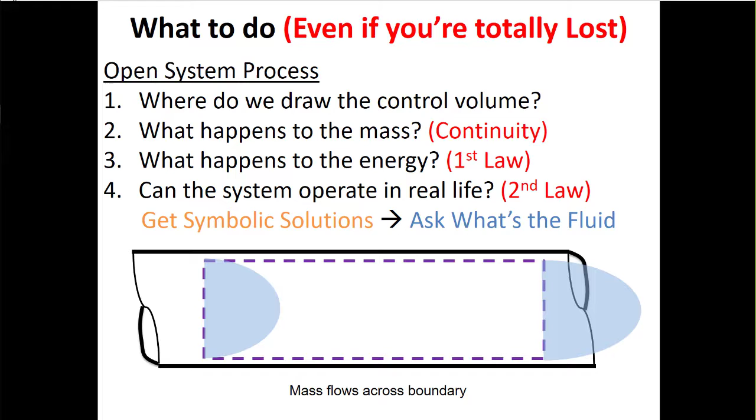You can do that for any open system problem. So if the problem is going to throw you a loop, it might be in how do you fix the state, right? And we know that fixing states can take a lot of time. So I always think, what's the highest rate of marks per minute that I can get on a test? I think getting the symbolic solution is a good way of demonstrating that you understand how to do the problem, and it tends to take much less time than when you start to fix the states. So that's my general advice - conservation of mass.

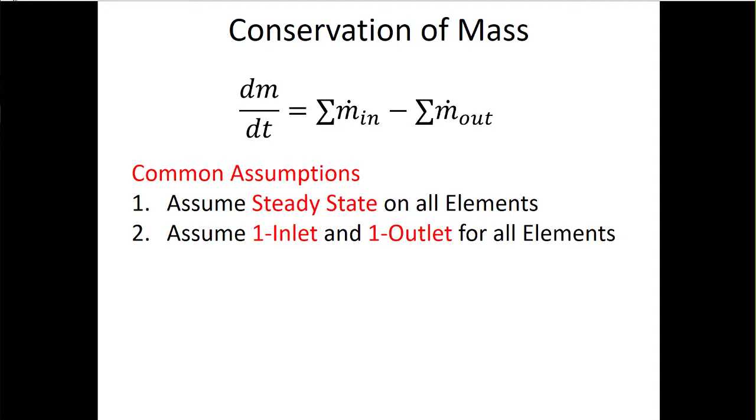Hopefully this expression is becoming familiar to you if it's not already. We know that dm/dt is equal to the sum of m dot in minus the sum of m dot out. Common assumptions, which are not the same every single time, are that the system is at steady state and often has one inlet and one outlet. If this is the case, we get the answer that the mass flow rate in is equal to the mass flow rate out, so sometimes we've seen that there's only one mass flow rate in our problem.

For open systems, the equation gets a little more complicated. I've written it out here as it would be for an imperial problem, because anytime a kinetic or potential energy term sticks around, my spidey sense starts tingling. The hairs on the back of my neck stand up, because in those terms I have to divide by gc if I'm dealing with imperial units, just to get energy per unit mass. If it's a metric problem, it's still going to give me an issue—I don't divide by gc, but it'll probably be in joules per kilogram instead of kilojoules per kilogram, so I've got to check the units there.

It's doubly hard maybe in imperial, because even after I divide by gc, often I'll get something like foot-pounds per pound mass, whereas when I look h up in the textbook, it will be in BTU per pound mass. So I might have to do something like divide by 778 to convert those foot-pounds into BTUs.

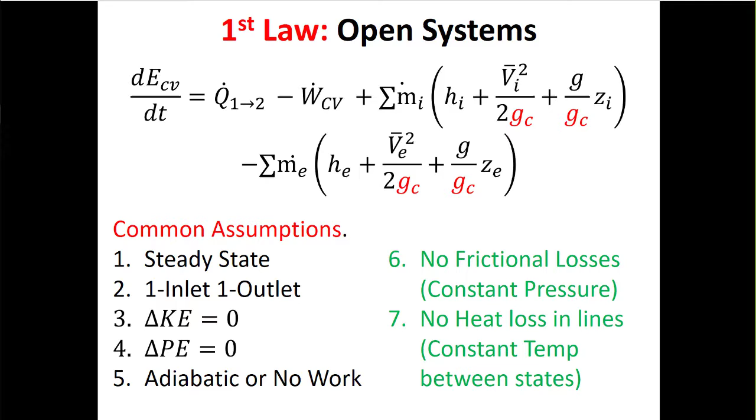Again, there's a list of common assumptions here associated with these different terms. If it's steady state, which in this class it basically will be, we'll cancel that term out. Often our open system components we assume are simple systems, meaning they either consume or produce power, or they transfer heat—so typically we can cancel out one of these two things, although I might ask a question on an exam that lets you demonstrate what to do if you have, say, a turbine with heat loss associated with it. One inlet and one outlet would mean we'd get rid of the summation signs, and usually we'll cancel out kinetic and potential energy terms as well.

When we deal with the second law, remember, whenever we do second law analyses, really what we're trying to do is figure out what's going on with this entropy generation rate. Sometimes, depending on how the question is worded, you don't even actually need a numerical answer here, because to figure out if something is possible, we only need to know if sigma dot is positive or negative.

So as an example, we've asked multiple choice questions where we ask if this thing is possible, and one of the answers is there's not enough information to figure out if it's possible or not. That can be true sometimes, but sometimes you can figure out if this term is positive even if you don't have the magnitude of the heat transfer. If I tell you there's heat loss in the system, for example, that might let you figure out the sign of sigma dot without knowing its value.

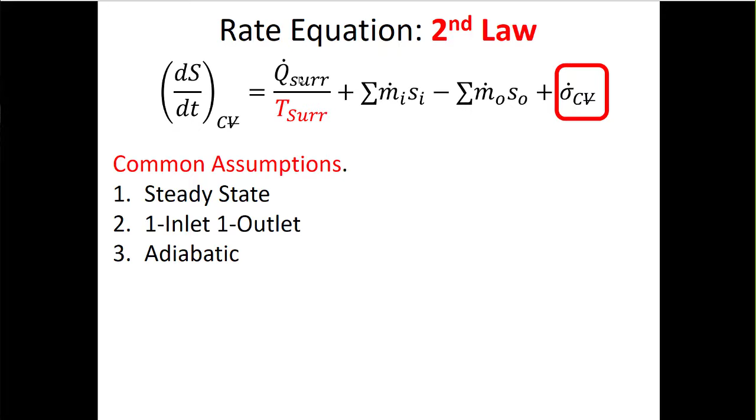So it's good to write down the equation, make your assumptions, get to that symbolic solution, and then see what are the terms. Even if I don't know the magnitudes of the terms, if they're both positive after I've isolated for sigma dot, then that means it's possible no matter what. So if I'm heating something up, for example, and I know the specific entropy is increasing and I'm adding heat, then I know the system definitely has to be positive. But you can figure that out mathematically just by looking at the terms of the equation.

After you get all your symbolic solutions, you'll invariably be left trying to solve for delta H or delta S. This is not unlike the first exam, where we were ultimately trying to solve for delta U. So after the symbolic part of the problem, we have to ask ourselves, what's the fluid? We basically have two types of answers: one is something like water, where we boil and condense the fluid, but it could also be something like refrigerants when we start dealing with refrigeration systems.

So that could also be under the vapor dome, right? And then we have to figure out what the phase is. So what's the fluid is always kind of a two-part question. So I say, what's the fluid? Oh, it's water. Okay, I know that it's water. Is it a subcooled liquid, or is it a two-phase mixture, or is it a superheated vapor? So it's kind of a two-part question, right?

And sometimes it'll be easy, like if they give you quality, then you can figure out pretty automatically it's got to be under the vapor dome.

But if, for example, you know that it's at the end of an isentropic turbine, right? So isentropic means delta S doesn't change, so you know S at the outlet, and now you look at that outlet specific entropy and figure out, is that above or below SG for the given temperature or pressure at the outlet? And then you can figure out, is it two-phase or is it superheated vapor? So sometimes it's obvious what the phase is, sometimes you might have to do a little digging to see what the phase is.

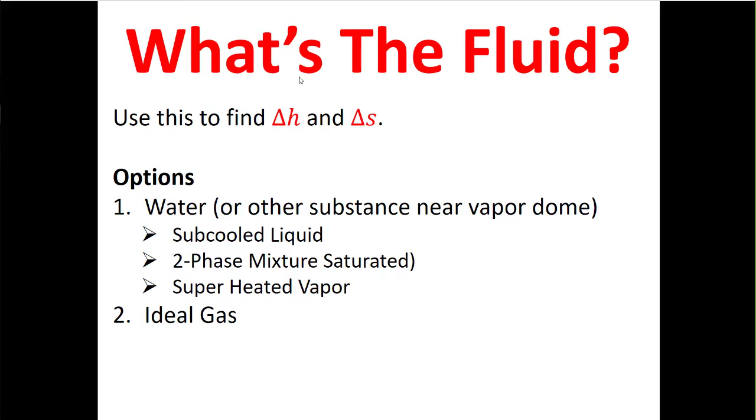Now, so if we're trying to find delta H, if we're trying to figure out what's going on with the first law, then maybe we're looking in tables. So this is certainly going to be true for water. If it's a subcooled liquid, we can also use the assumption that delta H is equal to CP times delta T. Although for liquids, CP and CV are the same, so you could just have C there.

When you do that, make sure you check your units, because we ultimately always want to have something like delta H in terms of, if it's metric, kilojoules per kilogram, because that's the H's we're looking up in the table, or if it's imperial, in BTU per pound mass.

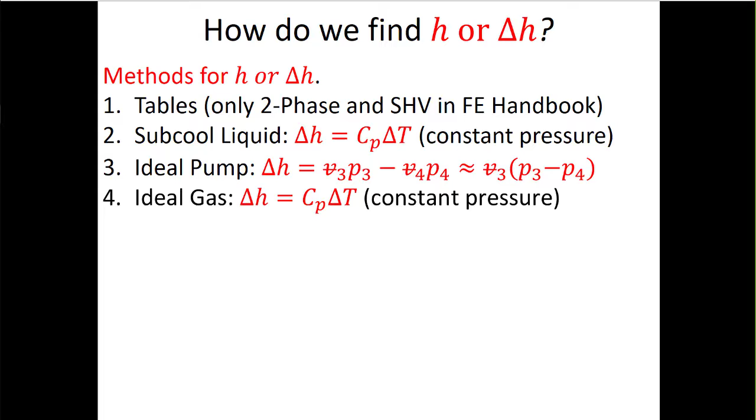Delta S, we started to talk about this. There's one more thing that I'll say about this today. So for solids and liquids, things like water, it's basically the same thing. We're going to look on the same tables and look up the same values.

But then we also have this new idea of isentropic pumps or turbines. We'll talk about compressors more later, but pumps, turbines, and isentropic or ideal compressors will be the same, in that the change in S across that device is going to be equal to 0. That's isentropic. We can get that from the first or second law, provided our system is at steady state, is adiabatic, has one inlet and one outlet, and is ideal. Then we end up with delta S equal to 0.

So we talked about how for subcooled liquids, we can find delta H as CP times delta T. When we're finding delta S, we replace that delta T with the natural log of T2 over T1.

For ideal gases, it's a little bit trickier. If we're doing variable specific heat, then we have delta S. On table A22, it's only got this S superscript 0 value. So this delta S superscript 0 is kind of like the change in specific entropy related to the temperature change. But then we still have to account for the pressure.

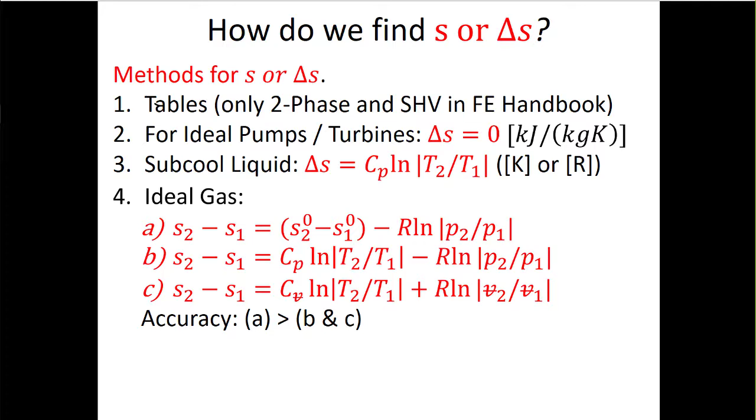As always with ideal gases, when you use variable specific heat, your answer is more accurate. When you use constant specific heat, you gain in convenience and suffer in accuracy. And that accuracy gets worse as your temperature difference gets bigger.

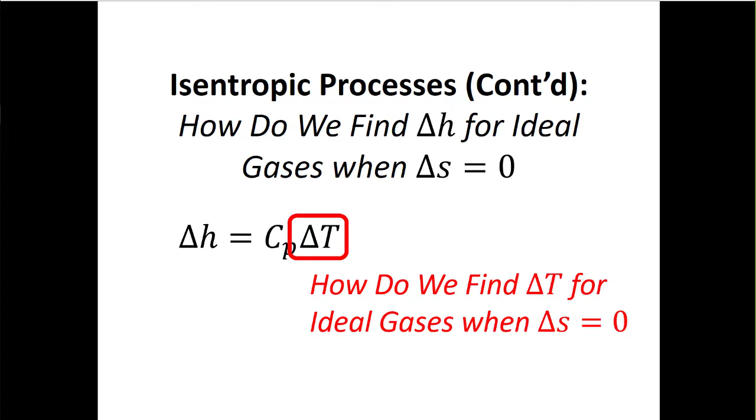So one thing we didn't talk about for ideal gases is how do we find delta H for isentropic systems. If we have an isentropic compressor, for example, or gas turbines where we assume the working fluid is something like air, you might want to find delta H in a case where the system is ideal. So we can look at something like Cp times delta T. Now, how do we find delta T if delta S is equal to 0?

So if we're trying to find the change in specific enthalpy, delta H, when the change in specific entropy, delta S, is equal to 0, there are a couple of options. If I'm doing constant specific heat, then I'm looking for an expression that has K in the exponent. Remember, K is Cp divided by Cv. So anytime you're using this, you've assumed that the specific heat is constant.

For open systems, we'll normally know the pressure differences, so you'll use this expression. This is all in the equation sheet, and I tried to organize it in a way that I thought was useful. There's a part of the equation sheet that talks about isentropic ideal gas processes, and then you know you can use this expression.

If you're looking for a system where you know the ratio of specific volumes, so a closed system usually, then you'll use this expression, which again has K in the exponent. It looks very similar. There's also this equation which relates the ratio of pressures to the ratio of specific volumes. I don't think in the 6 or 7 years I've been teaching this class that I've ever used that equation, but the first two are really useful.

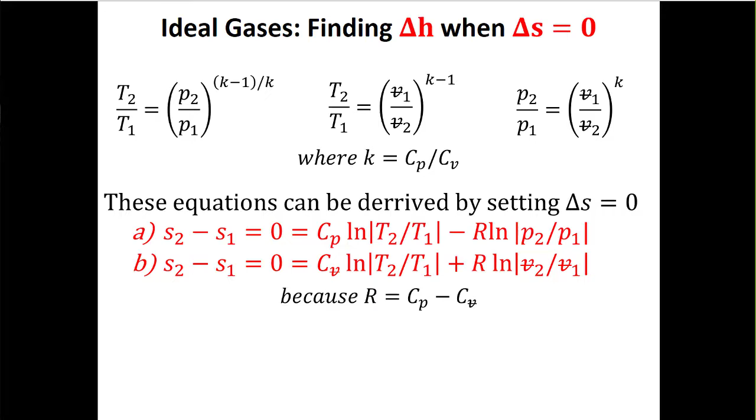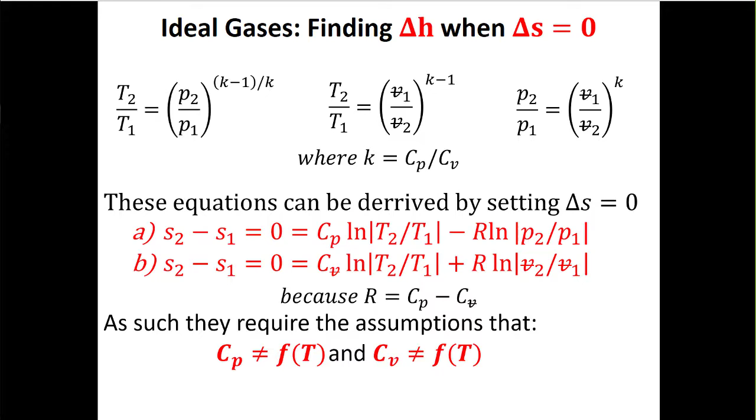These equations, essentially, you won't have to derive them, but they fall out of our equations for delta S when we're using constant specific heat. So then we can use these expressions. There's another way to do this for variable specific heat, but I don't think I'll test you on that in the exam because we haven't really had a chance to talk about it. It involves looking at a new parameter on the table. We'll do that when we start to talk about internal combustion engines, turbines, gas power plants, or jet engines. We won't really get into that here, but you'll be tested on it in the final.

So here's a quick example. If we have an isentropic compressor, remember, a compressor is like a pump. Its job is to increase the pressure. At the inlet, we start at 300 degrees Kelvin, close to room temperature, and close to atmospheric pressure, 100 kilopascals. Now we increase the pressure by a factor of 8, up to 100 kilopascals times that factor. That's the job of a compressor, to increase the pressure.

And we're asked to find the compressor power divided by the mass flow rate. Sometimes the textbook calls this the specific power, but that's just compressor power divided by mass flow rate. We're also told that this is an isentropic compressor. So you could get a problem worded like: find the maximum possible power, or I guess it would be the minimum possible power consumed by this compressor. That would be the isentropic state, because there's no irreversibilities here.

Hopefully we're familiar with the first law analysis. Here we'll assume that it's steady state, so that dE by dt term goes away, the Q dot term goes away because it's adiabatic, the summation signs go away, and we'll get rid of the kinetic and potential energy terms. So we'll get this expression we're used to when solving the first law for power: W dot is equal to M dot times H in minus H out.

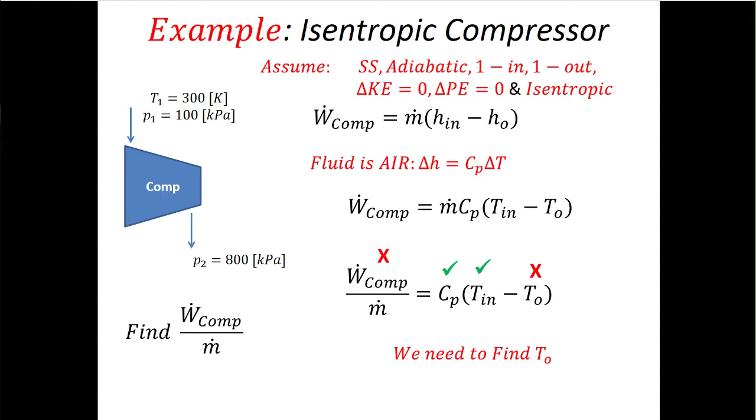So normally I'd look for a second independent intensive property at the outlet. Actually, because it's air, if I just knew the outlet temperature, I'd be fine, but I don't know the outlet temperature. So I need to know something about the process to help me fix the state. In this case, the thing I know about the process is that it's isentropic, or that delta S across this compressor is equal to 0. We're assuming this is an ideal compressor, so I can use this expression because I've assumed it's isentropic.

So now I say that T2 over T1 is equal to P2 over P1, all raised to the exponent K minus 1 over K. This is nice because I can multiply both sides by T1. Even though I don't know the temperature at the outlet of the compressor, I do know the pressure. So if I look up K in the textbook, or maybe it's given to me in a problem, then I know everything here, so I can find T2.

Right, so now I know everything here. I can put some numbers into my calculator. The nice thing here is because in the brackets I've got a ratio of pressures, I don't really have to worry too much about the units, as long as the units are the same. That's what I like about these—if you get pressure over pressure or temperature over temperature, just get them into the same units and you're just going to have a ratio here. So it's 8 times more pressure.

And then I get a value for my exit temperature, or at least what the exit temperature would be if this was an ideal system. I put that into my original equation for power over mass flow rate, and now I know everything for this problem and can get an answer. I'll check my units and see that I get a power that's negative, which is what I expect because a compressor is like a pump—I'm putting power in, so work in is negative. That's why I always like to calculate power as hi minus ho, because that will always give me the right sign, and then I can just add the works together. So that's how I deal with something that's like an isentropic compressor.

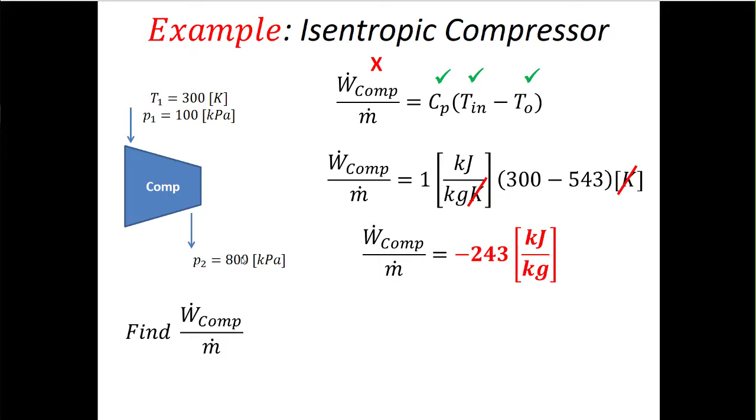So essentially, you're just looking to see—once you get to the point, oh, what's the fluid? The working fluid is air. And then you say, oh, it's an isentropic process, and that opens the door to using those isentropic expressions. So we said that the power is negative there, which is what we expect.

So now we're going to introduce the idea of what we call vapor power systems, or the Rankine cycle. The good news is we already know a little bit about the Rankine cycle—we did this when we were talking about ideal engines.

Kind of the simplest version of a steam-driven power plant, something like a coal power plant, would be this schematic here, where we have four components. We have a boiler, which is where we're adding heat—that's where we boil the fluid, aptly named. Then we have this turbine, and that's where the gas expands to produce power. But going into the turbine, we need high temperature, high pressure steam. That runs through the turbine.

And then the whole rest of this stuff is just to get back to that high temperature, high pressure steam. So first we take that steam and we condense it, because liquid water doesn't cost us very much power to increase the pressure. So then we run this through the pump. But now we have high pressure liquid, and we want high pressure steam, so then we boil it again, and we just keep going around and around and around. So this is the Rankine steam generation cycle.

Now, hopefully in all your classes you kind of think this—sometimes maybe ruefully. I remember when I was learning the heat equation, it was taught by a math professor, and it's like a differential equation. He's like, oh, this is like a heat equation, you mechanical engineers—and it's like we hadn't taken heat yet. So I was like, why do I care about this equation? And then the next year when I took heat transfer, I was like, oh, that's why. So you can never get the timing quite right.

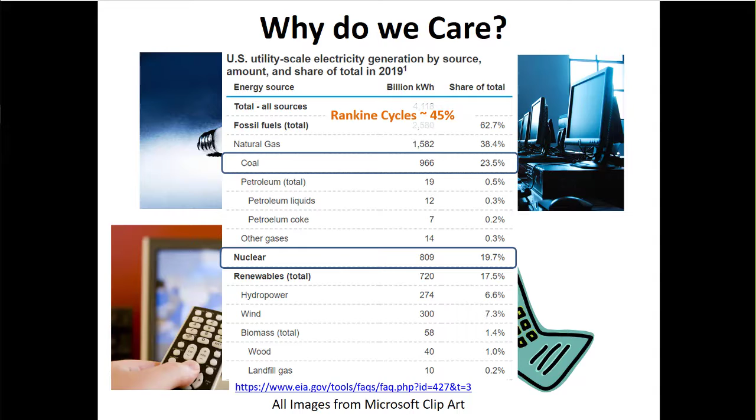Things like power generation - when I turn on the light switch, I'm never really worried that it's not going to go on, or at least I'm rarely worried. I think the power here in Rochester goes out a little too frequently, but even still, it's like a total of 10 hours it's down a year or something like that. Which is kind of a remarkable achievement, because engineers, technicians, and laborers are working really hard to make sure that we have things like power all the time.

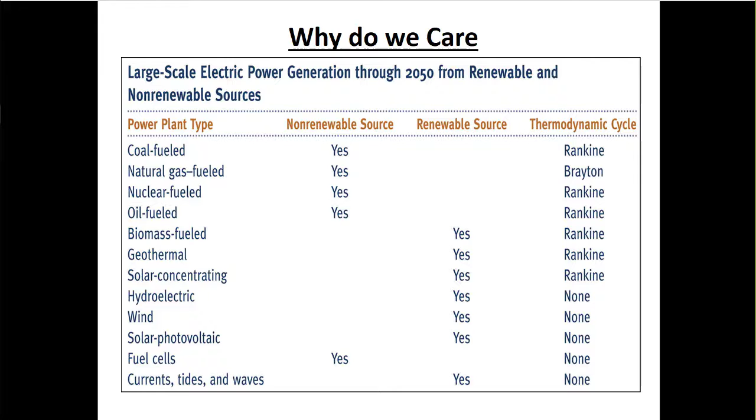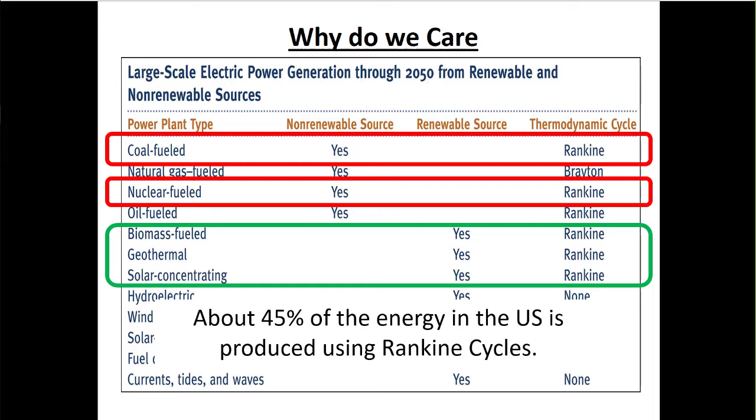So when we look at this table presented to us in the textbook, coal-fired power plants run on Rankine cycles. Nuclear power plants run on Rankine cycles. And then there's some renewable type energy systems that are also trying to use Rankine cycles to generate power. I think this tends to be a fairly small slice of our energy pie, but we're always trying to drive that up so we can limit the downsides of coal and nuclear power generation. About 45% of the energy we use here in the US is produced using Rankine cycles.

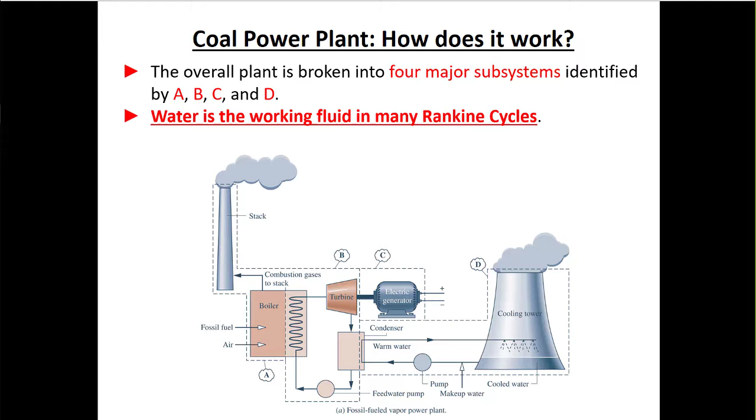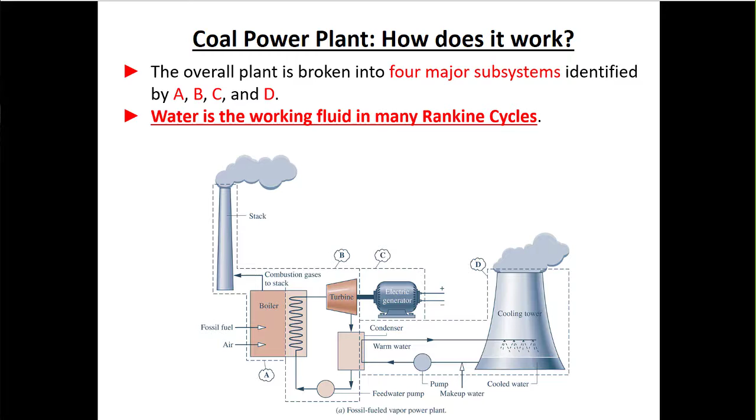So how does a Rankine cycle work? It's a bunch of different components that we can think of as open systems stacked together - now we're finally at the point where we understand how to do the Lego blocks, and now we're putting the Lego blocks together to make something cool. In the Rankine cycle, usually you have something like water running through it - boiling, going through the turbine, condensing, pumping up to pressure, and just around and around and around. Usually it is water, but for some renewable sources, or particularly when your heat input isn't that high, you could use other fluids that boil with less heat added.

So there are different kinds of subsystems involved in Rankine cycles. The first thing you need is to add heat, because that's what thermodynamics is - we put in heat and we get work, literally that's what thermodynamics means. So the first subsystem of this power plant is how do we get the heat, and this is actually usually how we classify different power generation systems. We talk about a coal power plant where we burn coal. We talk about a nuclear power plant where we run a nuclear reaction to generate heat. We talk about natural gas power plants - it's kind of a big deal in the US - we're burning natural gas to get heat. So that's how we get heat.

That's the first part. Then there's the part we're more interested in for this class, particularly for mechanical engineers - what are we going to do with the heat? How do we take that heat in and turn it into mechanical power?

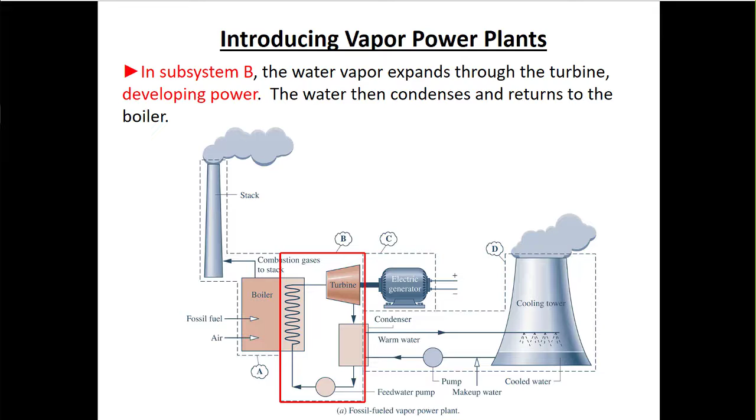The next subsystem - this is the reason, I don't know if you've ever seen old sawmills. Old sawmills have this big paddle wheel that's often in some kind of river, and as the river is running, it's turning that power wheel. That's going to be connected to some system, and then maybe to some four-bar linkage that's running a saw blade back and forth or something. It's great because engineers - we're not lazy, we're efficient - and it's not super efficient if you're the person sawing down trees all the time. So we were generating power, but you could only do that locally. The sawmill had to be beside the river for that system to work.

Then what happened is we made friends with electrical engineers, or electrical engineers started doing stuff. And then what we realized is I can generate mechanical power somewhere far away from my house. This turbine has a shaft that's spinning, and now I can connect this electrical generator to that spinning shaft. What the electrical generator does is take in that mechanical power and put out electrical power onto the grid.

Now, when we start talking about AC signals, we can transmit that power over power lines for pretty far distances. So you don't have to be in that sawmill right next to the river to get the power. You can put your sawmill wherever you want and just plug your electric saw into the wall.

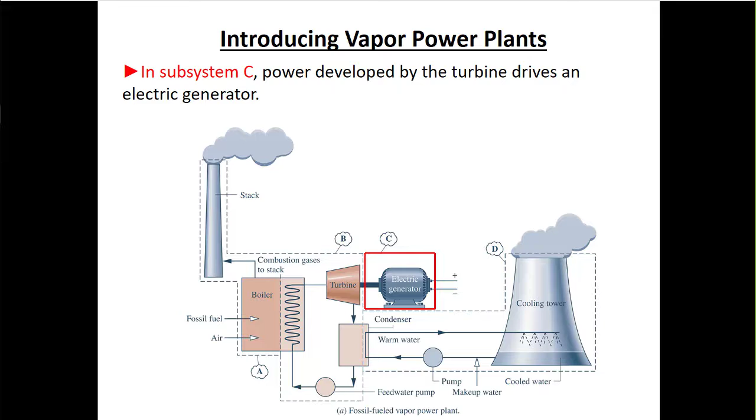The other part of this system: remember Kelvin and Planck told us you can run a heat engine, and that's what a nuclear power plant or coal power plant is. It's a heat engine because we're putting heat in and getting work out. But Kelvin and Planck told us we have to cool that system down.

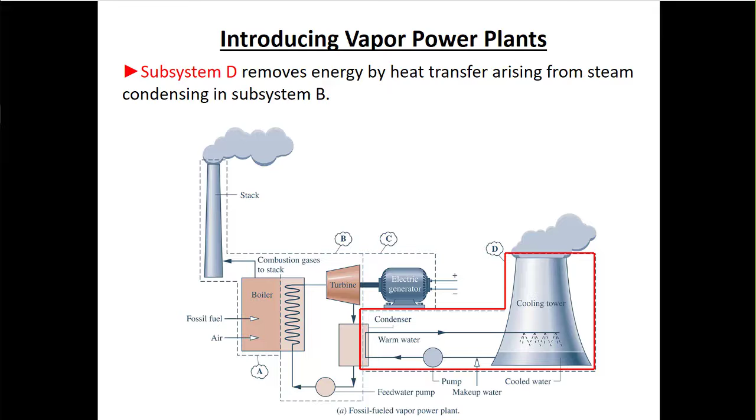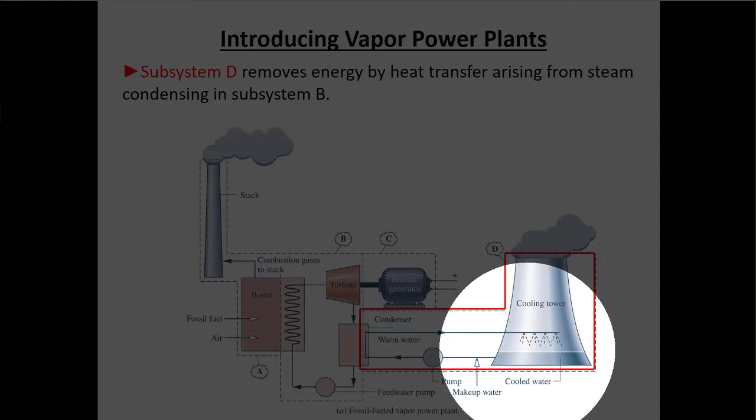So the way we cool this system down, at least in this figure, is we take that low quality steam that comes out of the turbine and cool it down. Here there's one of these big condensing towers, like you might see in The Simpsons. You spray this low quality steam in here, and the vapor goes up, but as it moves up this cooling tower it starts to condense and falls down. So you get cooled water down here, which you pump back into the condenser. Then this liquid water gets heat from here, maybe boils, and comes back in. So this is one way of doing it.

But we could swap this out. I did a little bit of consulting for a company that was itself consulting for Ontario Power Generation when I lived outside of Toronto. The way they cool the nuclear plants there is they take liquid water out of Lake Ontario and put it back in. But there's regulations about how much you can heat that water up, so you're not destroying the ecosystem in the lake. So that's another way — using Lake Ontario as a big heat sink. We need a heat sink in our system.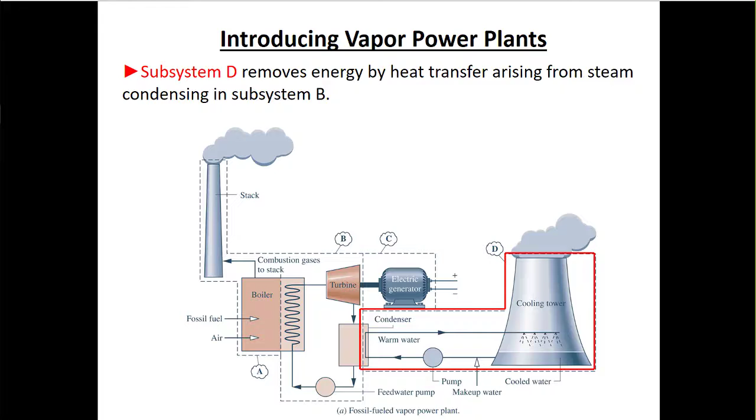Now, when we talk about Rankine cycles, we'll be independent of these other parts. We're really only interested in what's going on in subsystem B. We don't care how we're generating heat. We don't, in this class, talk about how to design an electrical generator to get that power onto the grid. And we're also not always super concerned about where the heat sink is — whether it's a cooling tower like this, or pulling water out of Lake Ontario. Really, we're worried about the guts: what's going on in here. This is what we'll be talking about — our turbine, our condenser, our pump, and our boiler. That's what we're going to be looking at.

What's going to happen is in here you have some working fluid, usually water, that's just running through this system on a cycle — around and around and around and around — and generating power for us.

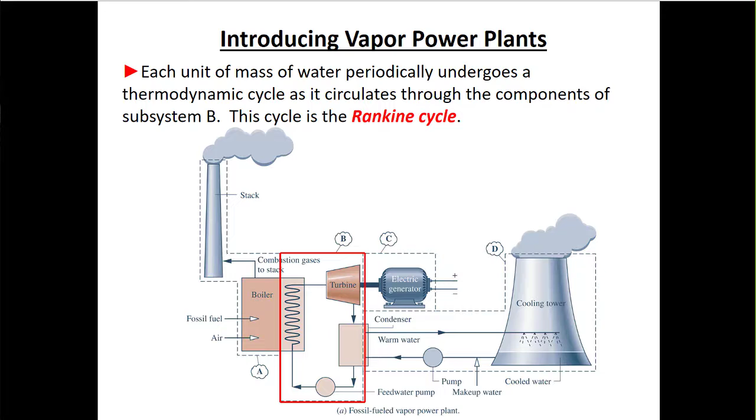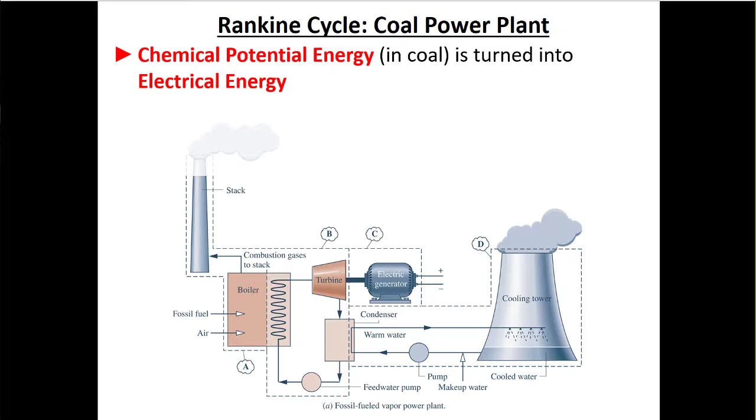If you have a coal-fired power plant, what we're doing is taking the chemical energy stored in fossil fuels like coal and liberating that into heat by burning the coal. Now, like all energy generation, this has a downside. It's good because it puts power on the grid, and we like power. But it's bad because there are emissions — we don't like the CO2 emissions.

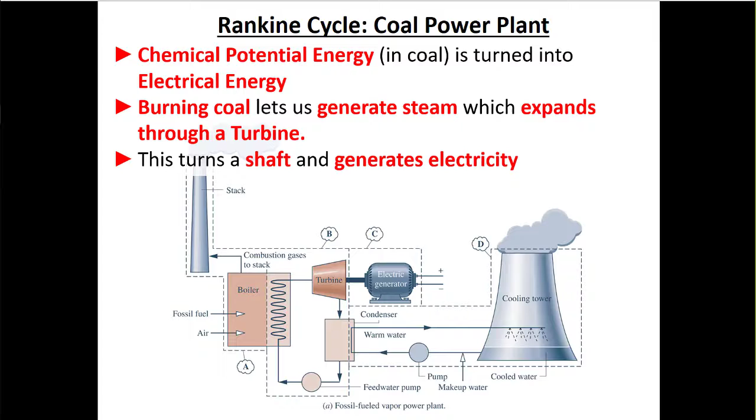So it lets us generate steam, which expands through the turbine because we're burning the coal. And then ultimately, inside our Rankine cycle, we're using that to get mechanical power in this spinning shaft, and we turn that mechanical power into electrical power through this electrical generator. So the cost here is that we're adding heat, and to add heat, in this case, we're burning coal.

Now, I remember being a little disappointed when I figured this out, or when I was told this: really, a nuclear power plant isn't much different than a coal power plant. Somebody figured out how to split the atom — amazing, one of the pinnacles of human ingenuity. And a mechanical engineer looked at that and said, it generates a lot of heat, I bet I could use that heat to boil water. So really, what we're doing is we just found a different way to boil water.

So this nuclear reaction puts out amazing amounts of heat, and we use that to boil water, and that water just keeps running around in our system over here. So it's the same thing, right? It's not much different than a coal engine, like an old style steam engine. We just figured out a better way to boil water, right?

Now, as you probably know, one of the big benefits of nuclear is that there are no emissions, right? The downside, of course, is catastrophic failure can be very catastrophic, right? There's no form of energy generation that doesn't come with a downside.

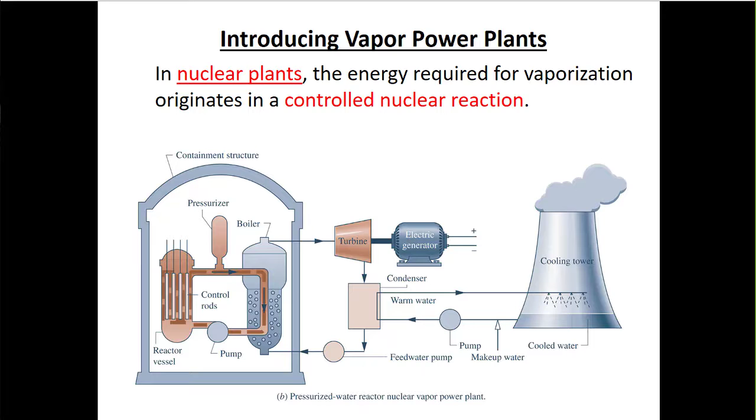So it's our job as engineers, if you're involved in a project like this, to make these things as safe as possible, because the downside risk, while the chance of something bad happening is very low, the cost of something bad happening is very high. Not just the monetary cost, but the human cost too. Not just the human cost even, but the environmental cost as well.

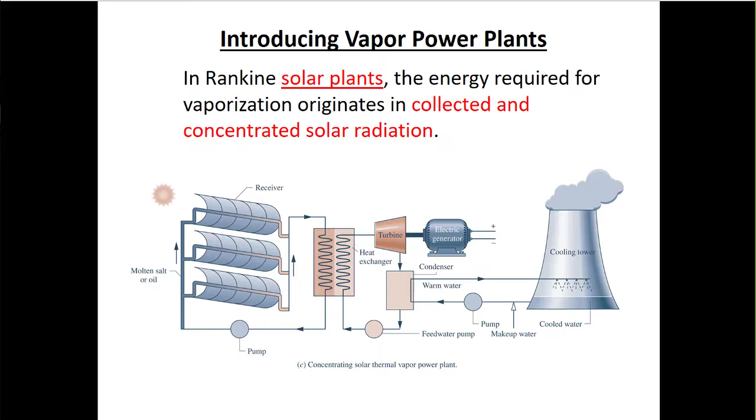So this is probably not the only way, certainly not the only way to get solar power, and not the normal way we think of solar power generation. But it's certainly something that you could do.

You could do this with geothermal plants as well. So geothermal means that we're taking heat that's being developed in the earth, and we take that heat out in a system. And then again, we're using that heat to boil some working fluid to run through the cycle.

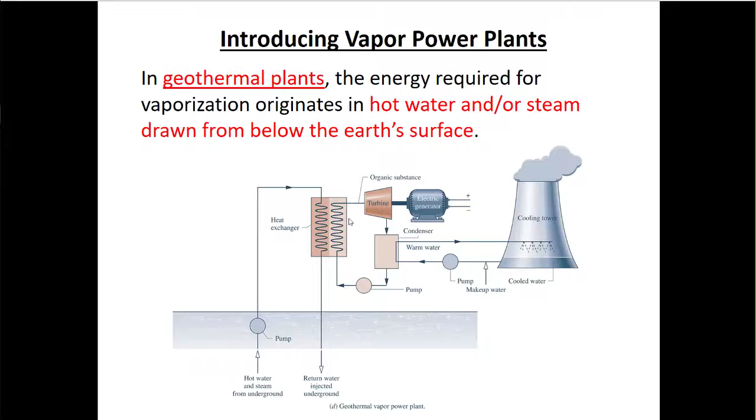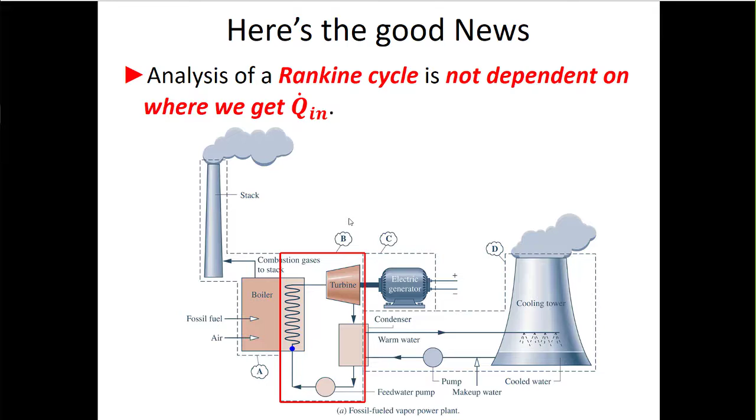So all of these different things, there's different ways to generate heat, but we're sort of heat agnostic when we're talking about Rankine cycles. That means we don't care where the heat comes from in this class. We just use it as an input into the system, and we'll analyze the guts of the cycle here: the turbine, the condenser, the pump, and the boiler. It's the middle that we care about. We don't care how you're generating heat, and we don't care how you're rejecting heat either. We're going to analyze the middle of the system, because this is where the efficiency gains can happen if we're trying to develop a system like this.

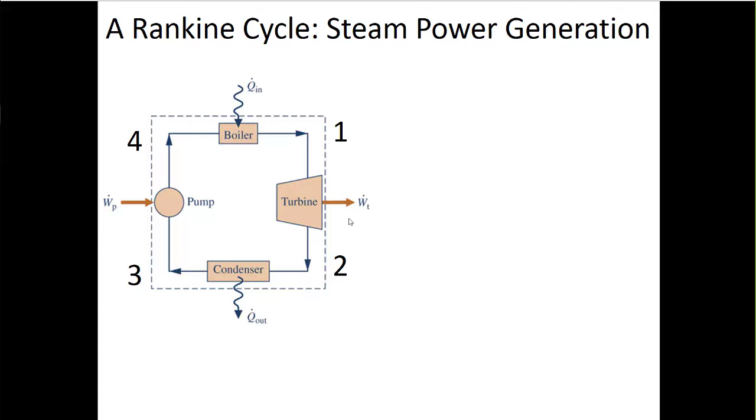So a Rankine cycle, at least the most basic form, would look like this. In practice, they're much more complicated, and we'll get into some of those complexities because we fight tooth and nail for any sort of percent increase in efficiency that we can get. But it makes sense to start at the beginning. The most basic version of a Rankine cycle we can have has one turbine, one condenser, one pump, and one boiler.

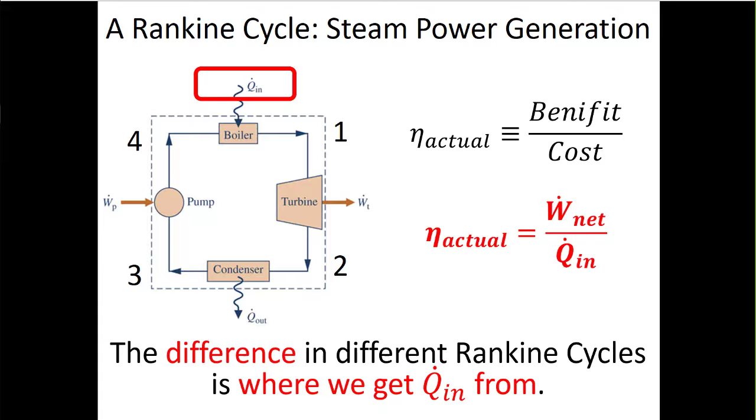And what we're going to do is, it doesn't matter where the heat comes from. The way we're going to analyze the system is we're going to look at these components, and we don't care where the heat comes from. We talked about analyzing a system like this globally by talking about its thermal efficiency. So now we take the energy benefit, that's going to be the net power produced: the turbine power, which is positive, plus the pump power, which is negative. That's our net power, that's the energy benefit. And the cost is that we had to add heat, either by burning coal or maybe by running a nuclear reaction. So our thermal efficiency here is the net work divided by the heat in. But we don't care where the heat came in when we're calculating the efficiency here. That's just a characteristic of the cycle.

So like I said, this is the simplest case, and it's got four components: a boiler, a turbine, a condenser, and a pump.

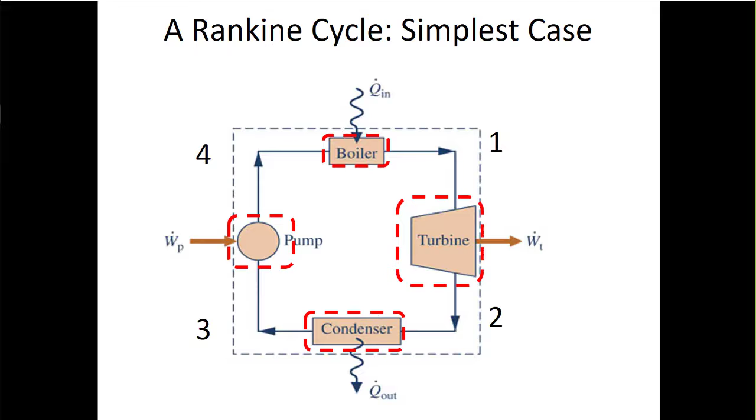So what we do is we can take an open system analysis on each of these components, and then look at them together to see what's the net work and what's the heat transfer in. And then we can find the thermal efficiency.

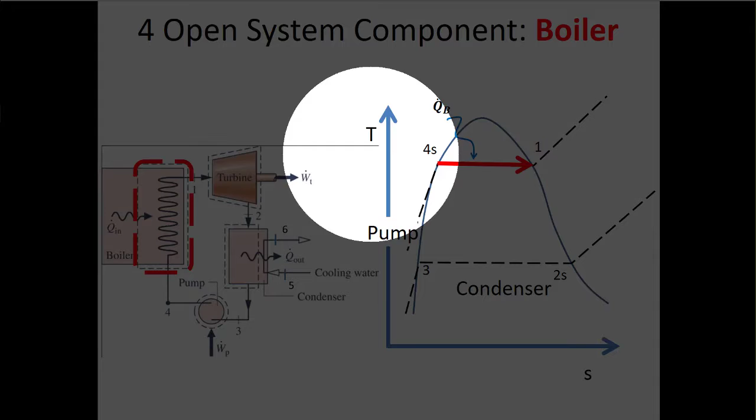If I was drawing a TS diagram, remember we did this already, I sort of sneakily introduced you to this topic. So our boiler, in this case that we talked about before, went from saturated liquid to saturated vapor. And then our turbine was producing power. This was an ideal or isentropic turbine when we talked about it, so we went vertically down from state 1 to state 2s, and we produced power in this turbine.

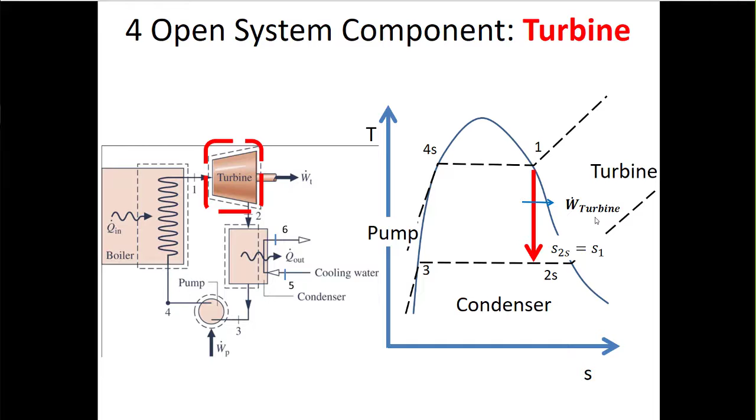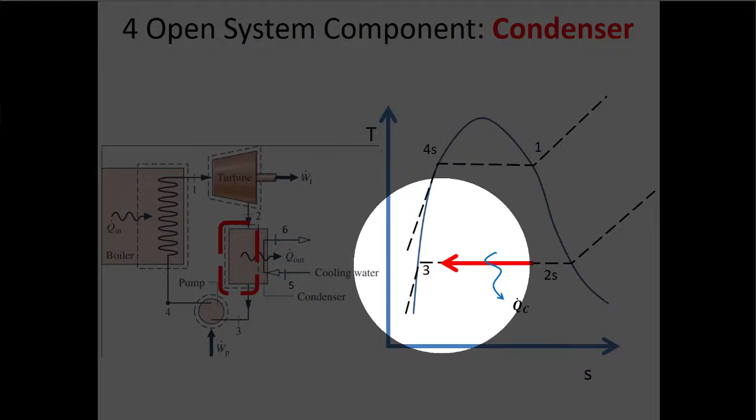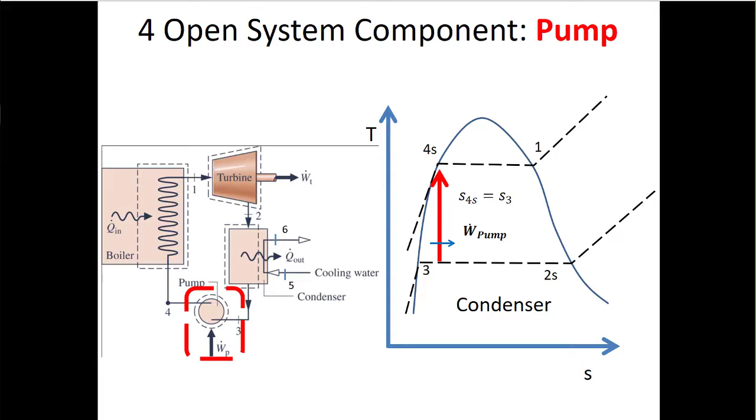Then we went through the condenser. We went from whatever quality we came out of the turbine down to some lower quality. Usually you'd come right down to here, but remember for this example, I wanted to be all under the vapor dome, so we came down to here. And then we added some power in the pump to get back up to the pressure that we wanted. And then again, you'd go through the boiler to get back to this high temperature, high pressure steam that you want to go into the turbine so that you can generate power. This is called a cycle because we just keep going around and around and around.

I like to draw the main energy component of each of these processes on the diagram, but you don't have to do this. I like to remind myself, this is where we're adding heat, so my heat line, which is wiggly, goes into the boiler. This is where we're producing power, work out, so my arrow goes out of the cycle. Here's where we're rejecting heat, here's where we're adding power in. I like to draw those on, but you certainly don't need to.

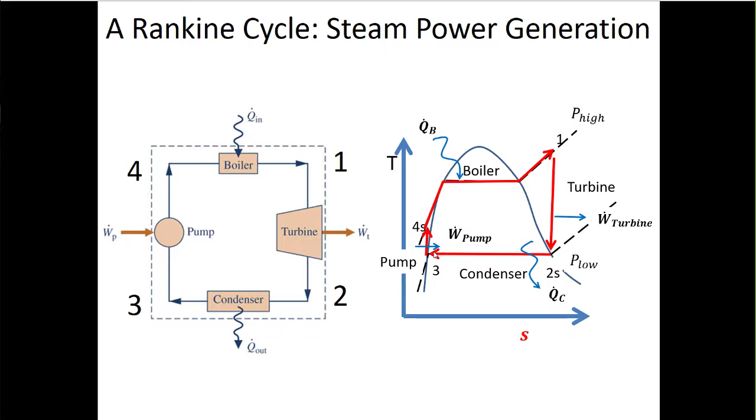So if we want to know the thermal efficiency, we want the net power divided by the heat transfer rate in. The net power means I got to look at the turbine power and the pump power. So how do I find those? The textbook will tell you that it's the turbine power minus the pump power. What the textbook doesn't tell you is that it's taking absolute values of those expressions. Instead, I like to use the first law and add those things together. The other thing we'll need to do here is look at how much heat is coming in to the boiler. If I know those three things, then I can go and find thermal efficiency.

So I can talk about my Rankine efficiency, at least for this system, as the magnitude of the turbine power minus the magnitude of the pump power divided by the heat added at the boiler. Or if I want to drop all those absolute value signs, the way that I like to do this—because I always like to get these expressions, W dot and Q dot, from the first law, so I don't mess up the sign—I let the first law take care of the sign for me. But when I do that, I got to remember that I'm adding the turbine power to the pump power, and that gives me the net power.

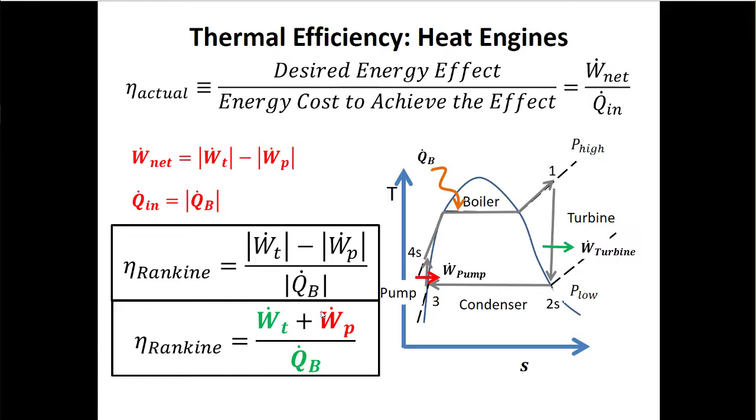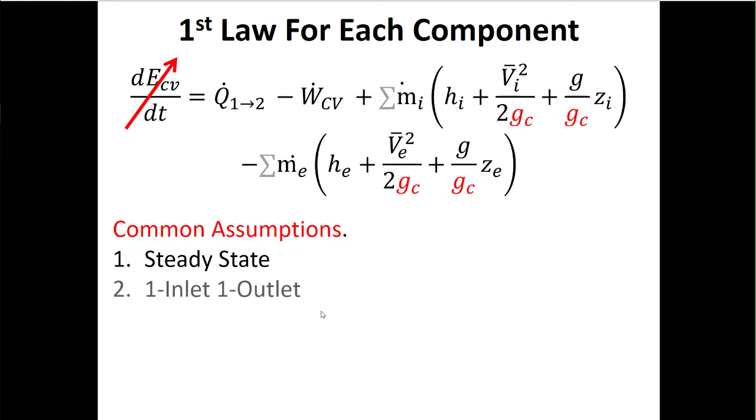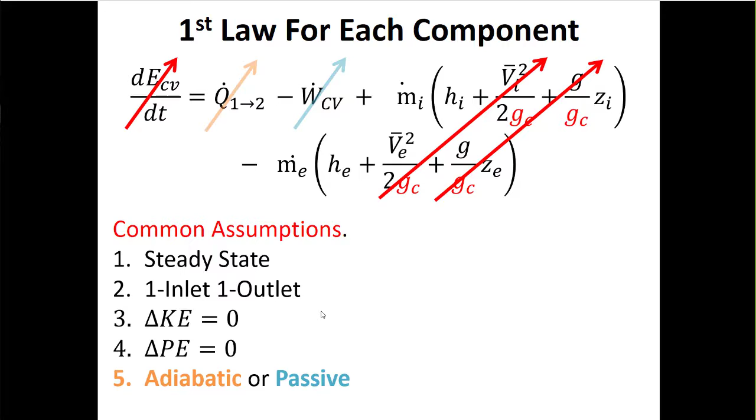So for common assumptions, for all of the components, I'll say they're at steady state, that there's one inlet and one outlet, no kinetic energy change, no potential energy change. And then I got to pick, is the component adiabatic? Usually the turbines and pumps we'll assume are adiabatic, that there's no heat loss from those components. Or are they passive? So if I'm looking at the boiler, when I'm trying to find the heat transfer rate, I'll often assume that that's passive, that there's no pressure losses or things in the system, no fan blades in the system either, so I cancel out that W dot term.

The other thing that I do when I have to talk about cycles, I'll assume that there's no friction losses in the tubes that connect the different components, and no heat losses in those tubes either. Now, this isn't really true, but it makes your life a lot easier. I think at one point there's a question in the homework where you don't make those assumptions, and that means you have to do first law analyses on the individual pipes connecting our different components. And while that'll get you a more accurate answer, in terms of this class, it doesn't really allow you to demonstrate your understanding of thermodynamics any better.

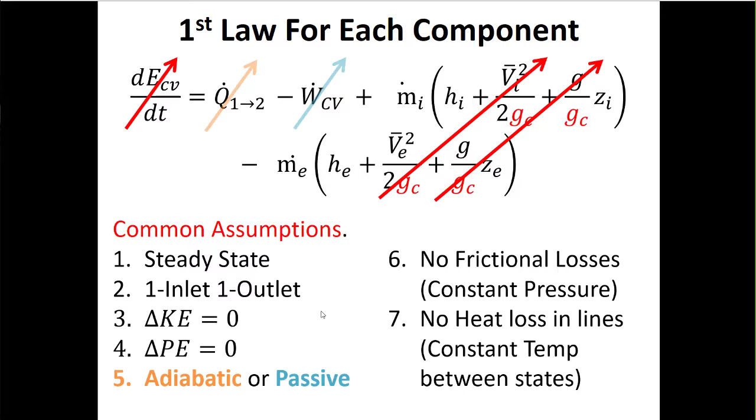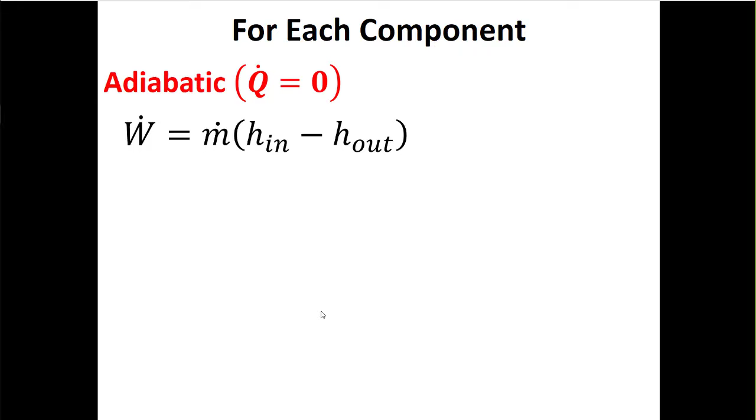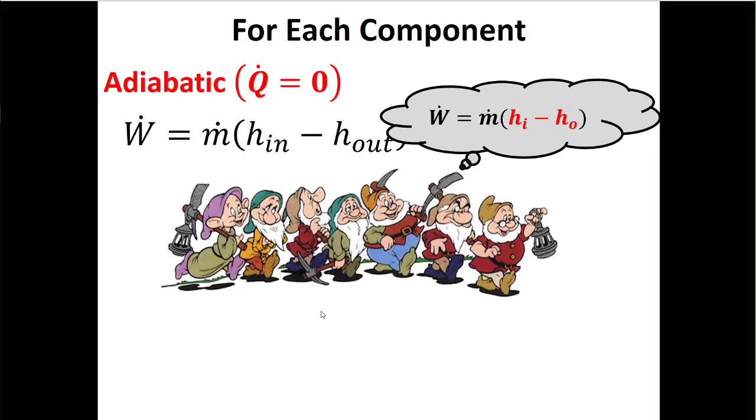So we typically make those assumptions so we're not fixing an extra 7 or 8 states, right? So for each component that's adiabatic, this is going to be the turbine and the pump. We'll get that power is equal to M dot times H in minus H out. If I'm trying to find power, which is like work over time, then I get M dot times H in minus H out.

If the system is passive and I'm trying to find the heat transfer rate, then it's M dot times H out minus H in. It's a good thing to kind of remember what these things look like. But again, on your exams, I'm always going to encourage you to take the extra 20 seconds and write down the base level of the equation, make your assumptions and cross terms out, because that's how you demonstrate your understanding.

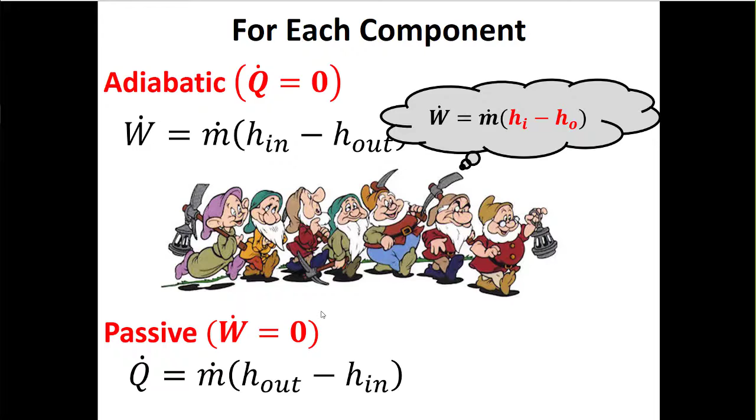If you can make all the assumptions we expect to make, these are going to be the answers that you'll get. The turbine power. So on Rankine cycles, we typically label state 1 as going into the turbine and then go around the horn from there. But I could label a different state 1, and then if you only memorize these equations, you'd get totally wrong answers if you didn't understand what you were doing.

But typically, if state 1 is the inlet to the turbine and we just go sequentially around the cycle, then you get M dot times H1 minus H2. That's the turbine power. We expect that to be a positive number. The heat rate out at the condenser is M dot times H3 minus H2. We expect that to be negative because that's heat out.

The pump, where we're putting power in, that's M dot times H3 minus H4, in minus out. We expect that to be negative because we're putting power in. The boiler, where we're adding heat, we expect that to be positive, and it's M dot times H1 minus H4. I've left subscripts on the mass flow rates here, but if you do a conservation of mass analysis like we did previously in the example, and we'll do again in the example tomorrow, you'll notice that all these mass flow rates end up being the same.

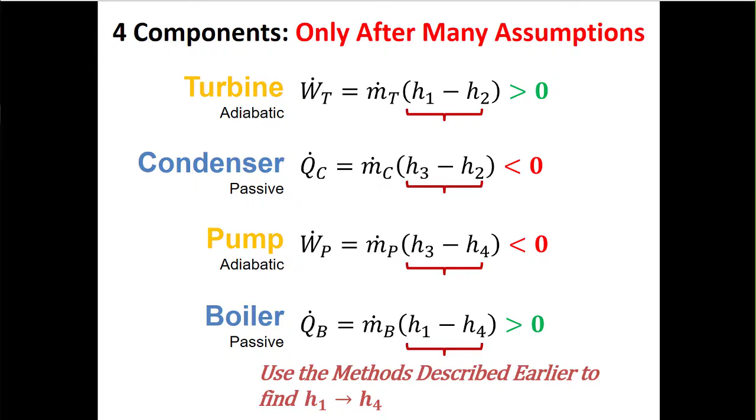So then after you did this symbolic solution, then you say, oh, what's the fluid? Oh, the fluid's water. Okay, how do I go through and fix all these states and find numerical values for these powers and heat transfer rates? So now that I have expressions for the individual components and the power and the heat transfer rate associated with those components, I can find a thermal efficiency.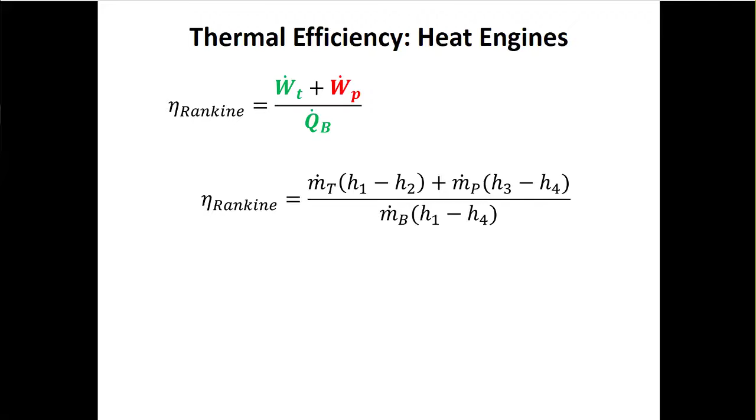So I put the equations on the last sheet into here. I notice that all the mass flow rates are the same, because we're steady state with one inlet and one outlet, and all these things are connected in series. So the mass flow rates drop out, and my thermal efficiency is just an expression of specific enthalpies.

So I can look at this like this, or I can use little w dots. That's like big W dot over M dot. Or sometimes I think the textbook calls it specific power, or specific heat rate. That's big Q dot over M dot. So I could write it down like that.

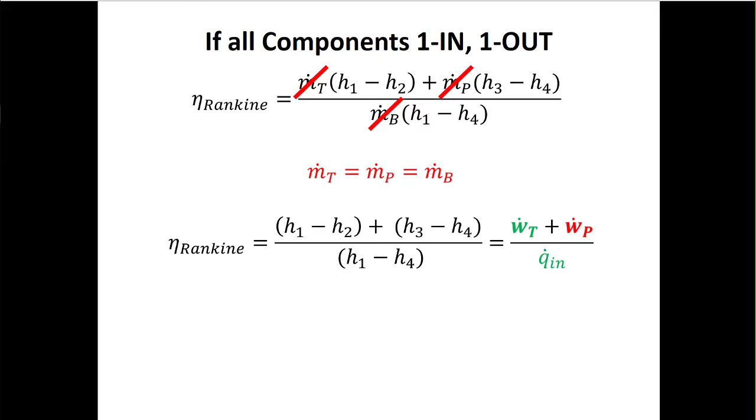This is helpful because sometimes you don't know the mass flow rate, but you can still find the thermal efficiency if you want. Or it's just one less number to keep punching into your calculator. And if you're like me, I'm really good at making mistakes when I put numbers into my calculator. So, anything that I can cancel out helps me avoid making a mistake. This is the expression that we did last time. So we'll go through a full example next class, so don't worry.

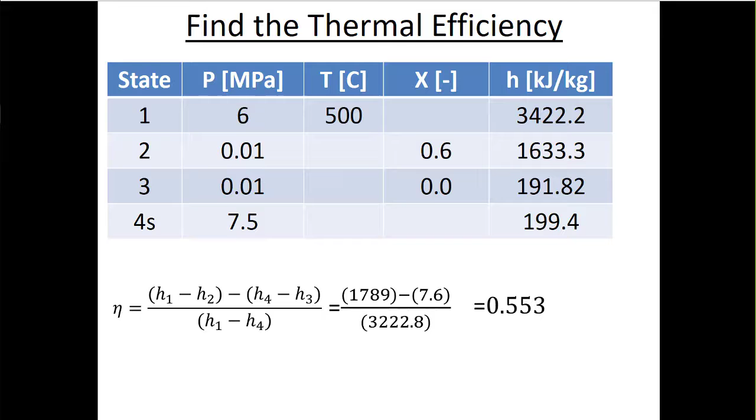We had this ideal efficiency, or ideal Rankine cycle, although we didn't know it was called a Rankine cycle before. We found all these H's. When we put the values into our thermal efficiency equation, we got that the thermal efficiency in this case was just over 55%. If you think about it in terms of academic performance, you might look at 55% and say that's not very good. But in terms of a heat engine, that's actually reasonably high. That's not an unreasonable thermal efficiency for a power plant.

So you might look at it and say, why? Remember, Kelvin and Planck told us that in order to run a cycle for a long period of time, you have to take heat in, but you also have to reject heat as well. Now, the downside of using water in Rankine cycles is that you have to lose a lot of heat to go from steam down to a liquid. Remember, a watched pot never boils, right? That means it takes a lot of heat to boil water. It's also true that you have to reject a lot of heat to condense water.

Remember that the net work is going to be the heat rate in minus the heat rate out. So because we have to reject a lot of heat when we're condensing liquids, that's less heat available, or less energy available, for us to turn into power. So condensing liquid is something that can rob us of efficiency. That's kind of the downside of these Rankine cycles: although we're always working to make the efficiencies higher, there's a natural limitation here because we have to condense the liquid.

One of the things we then try to do is maybe scavenge some of this heat. So this heat output from this cycle could be a heat input into some other cycle.

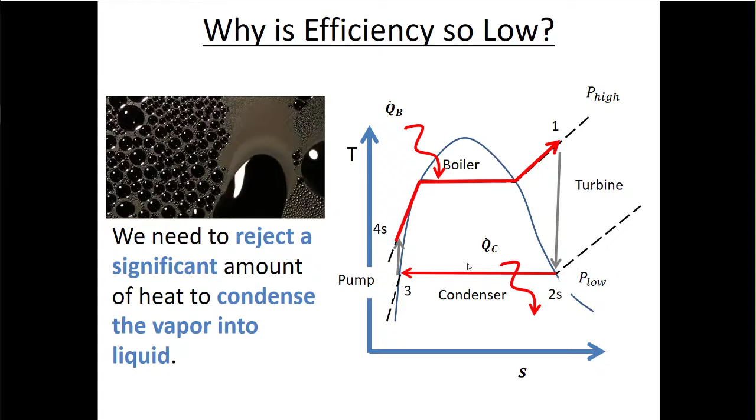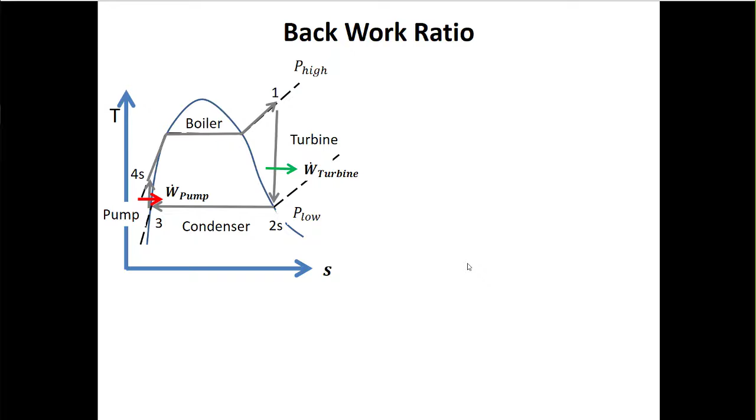But one of the reasons that this was kind of one of the first kinds of power plants that we looked at is because the backwork ratio is relatively low. So what's the backwork ratio? This is the ratio of the power consumed by the pump to the power produced by the turbine. Because the pump is the first consumer of the power plant's output, we would like this backwork ratio to be relatively low, because that means at least the majority of the power I'm producing in the turbine is going out onto the grid.

It's not being consumed by the pump. If you had a backwork ratio of 1, or 100%, there'd really be no point in running your power plant, because you would just be running your power plant to run the pump so that you could run the power plant. You'd just have a system that was running for no reason.

So again, if everything has one inlet and one outlet, and is at steady state and adiabatic, then we get just a ratio of delta H's: delta H across the pump divided by delta H across the turbine. Backwork ratios we'd normally report as a positive number, even though the sign of the pump power is negative.

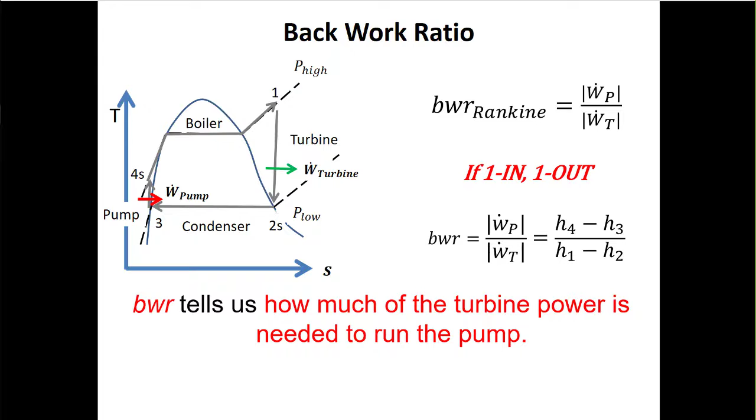The nice thing about these Rankine cycles is that the backwork ratio is very low, which is what we want. In this example it was less than 0.5%, meaning about 99.5% of the mechanical power we're producing at the turbine goes out onto the grid. That's the nice thing about Rankine cycles: they have low backwork ratios.

I realize I went over a little bit, but that is all I wanted to talk about today. Next class, we'll go through an example on how to do a full analysis on a real Rankine cycle.